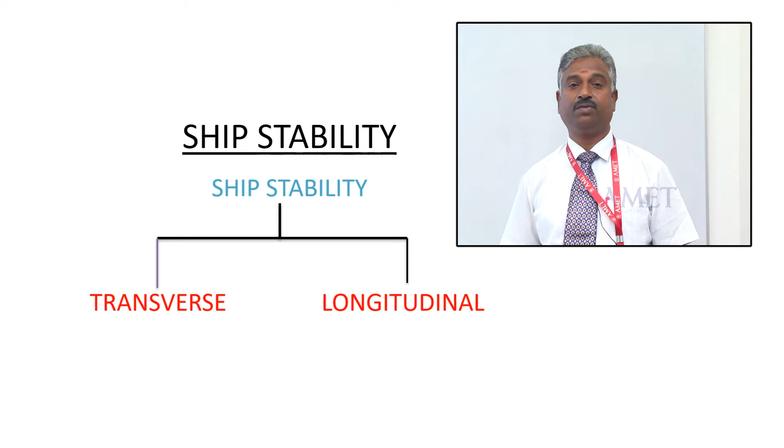But it is not the same in the case of a ship, because the ship is moving in the water, floating in the water. Water will not remain calm always. The sea will be always changing its state, sometimes calm, sometimes it will have more waves. According to the property of the sea, the ship has to respond.

So the ship will never always go upright. It has to list, roll or trim in various states. When a ship is disturbed by external force, whether natural or artificial, whenever that force is removed, the ship must come back to its original position and float upright. That is the property of a ship.

That is what is called stability. It is the ability of the ship to float upright, and also it should move - it should not that it should only stay in one place, it should keep on moving. That is what stability is. We can divide stability into two.

One is transverse stability, another one is longitudinal stability. In this class, we will first discuss about transverse stability. Transverse stability is a very important concept in the ship's properties.

Most ships lose their stability, or most ships even sink, due to loss of transverse stability only. There are less chances of loss of longitudinal stability in case of shipwreck. Otherwise, in different weather states like tsunami or rough weather, we can only see a loss of transverse stability, but not longitudinal stability. So transverse stability is very important in a ship's life.

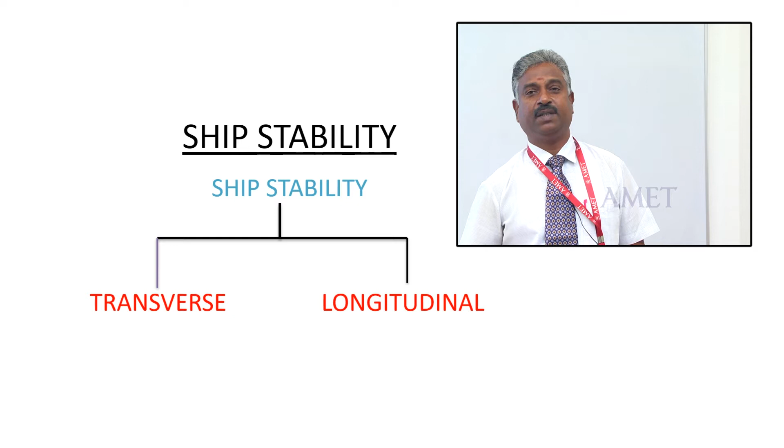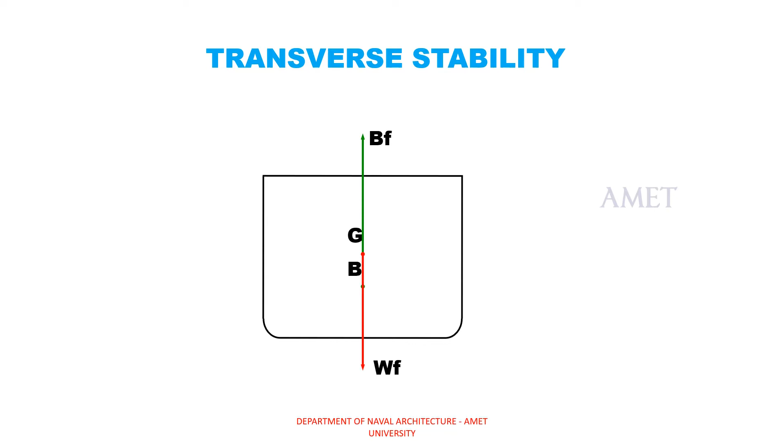This is the cross sectional view of a ship, generally we draw this to discuss about the ship. This is the center line of the ship. For a ship to float upright, there are two basic forces.

Like in our normal life, in our body, when I am standing like this, there are two forces: one is my weight, along with the weight the gravitational force acting downward, and the reaction force. When these two forces are balanced, then only I can stand. When a man falls down, it means there is a difference in the reaction of these two forces.

Same way, in a ship there are two basic forces: one is buoyancy force, referred to as BF, another one is weight force, that is the weight of the ship. BF is the buoyancy of the ship. What is buoyancy? Buoyancy is the upthrust given by the water for the ship to float.

When any object floats in water, it experiences an upthrust. That only makes that object float. How an object will float or sink depends on density.

Density is an important concept which makes the object either float or sink. When the density of the floating object is less than the density of the water in which it is floating, then the object will float. If the density of the object is more than the water, then that object will sink.

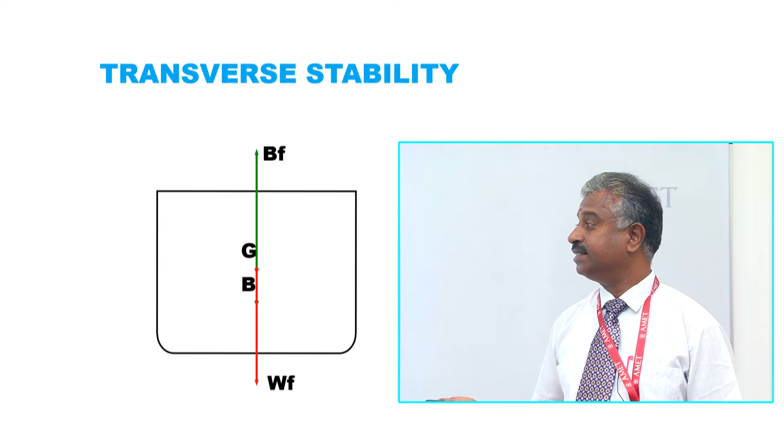We may say that in any game you take, there is a trump card. For example, in playing cards, there are trump cards or jokers which decide the game. Same way, these two, center of gravity and center of buoyancy, are the two main components which decide whether the ship will float or sink.

It is very interesting to know how this works. The center of gravity, we know, always acts downward through the body of the ship, that is the center line. Same way, center of buoyancy - most of you may not know the definition, what do you mean by center of buoyancy.

Why? Because center of gravity you already studied, it is quite common - it is a point through which all the forces are assumed to act downward, it is an imaginary point. Center of buoyancy is similar to that, but it is opposite. What is center of buoyancy?

Center of gravity is related to the mass of the ship. When the mass of the ship changes, the center of gravity will obviously change.

Whereas center of buoyancy is related to the underwater volume. What is underwater volume? Underwater volume is the volume of the ship below the waterline. That underwater volume also will have a center of gravity, and that center of gravity is called the center of buoyancy.

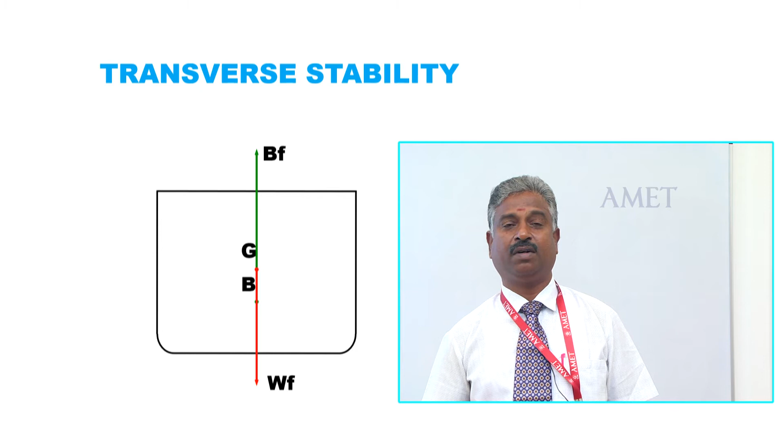So this is the relation between center of gravity and center of buoyancy. Now let us go to the next concept of transverse stability. This is what we have discussed right now: G, center of gravity; B, center of buoyancy; WF, weight force; BF, buoyancy force. We will see the next slide.

What is transverse statical stability? As I told you in the introduction, it is a term used to describe the ability of a ship to return to upright when it has been forcibly heeled by an external force to some angle and is momentarily at rest in still water. This is what statical stability or transverse stability means, and we are going to continue with the next slide.

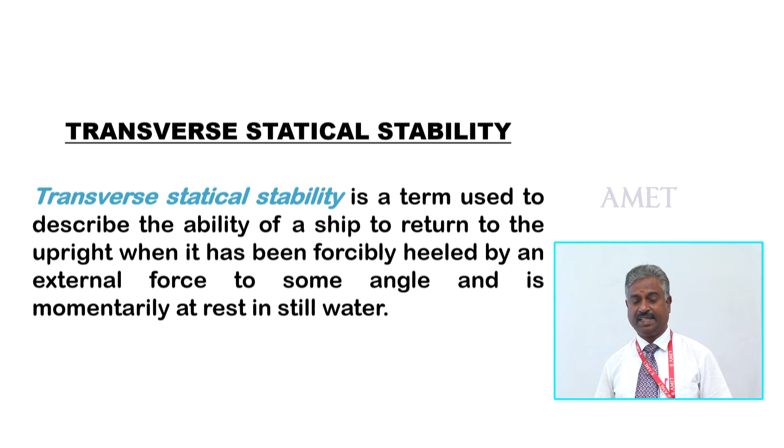What is G? It is the relative position of the center of gravity and the center of buoyancy as the ship is heeled to a particular angle that determines how stable a ship is. That is what I just told you, how important G and B are and what is the relation between them. When the ship is upright, the lines of action of both the weight force and the buoyancy force act through the points G and B as shown. If the ship is heeled by external force, as I told you, that is the difference between heel and list.

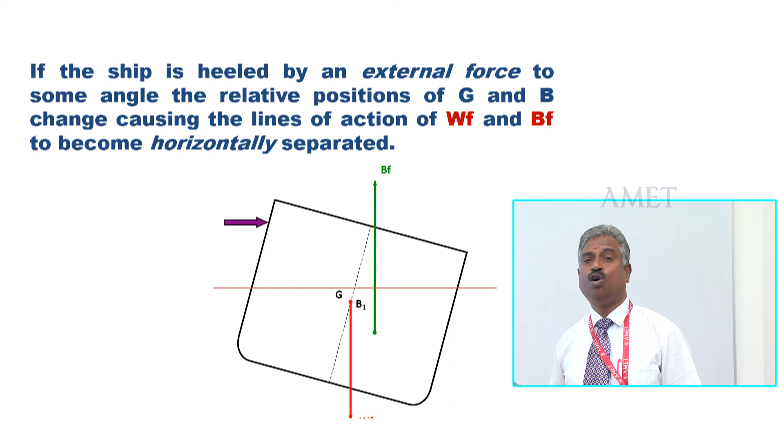When you say heeled, it means it is due to external force only, like wind and waves. When it is heeled by an external force to some angle, the relative position of G and B will change, causing the line of action of weight force and buoyancy force to be horizontally separated. Now you can see from the diagram, the center of gravity and center of buoyancy no longer lie in the same line. It has been separated, you can see it here.

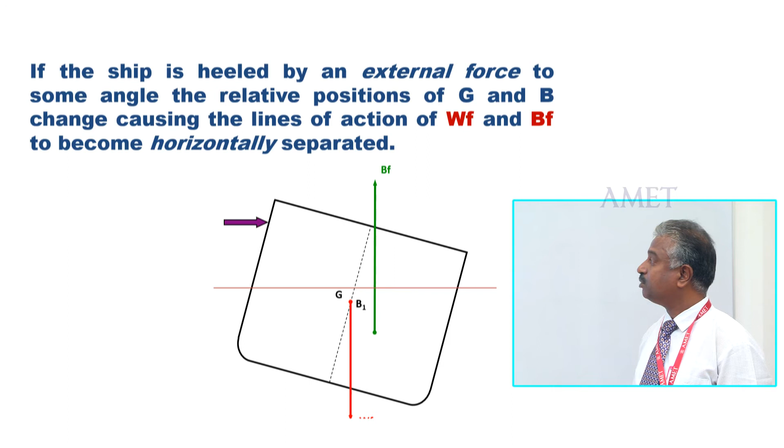This is the new center of buoyancy, through which the buoyancy force acts, and this is G. You can see where G has not changed, only B has changed. You can further understand this in the next slide.

Now it is clear to you. Here you see this is G, which is still lying on the same center line, with the weight force acting downward, whereas the buoyancy has now shifted from the center line, acting upward. This is the water line, and this is the underwater area.

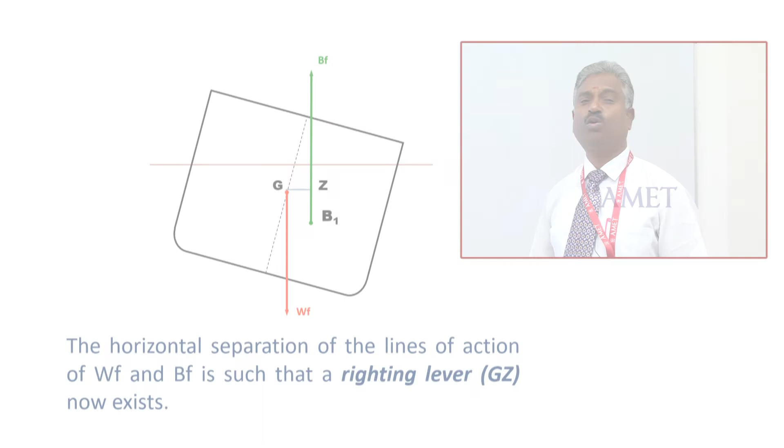Now, the question is why does the center of buoyancy shift but the center of gravity does not shift? This is a very fundamental question. I already told you that the center of gravity depends upon the mass of the ship, whereas the center of buoyancy depends upon the underwater volume of the ship. When the mass of the ship changes, the center of gravity will change. When the underwater volume changes, the center of buoyancy will change.

Here, only the underwater volume is changed. That is why the center of buoyancy is shifted.

With respect to the center line, the underwater volume on the port side is less and the underwater volume on the starboard side is more. So obviously the center of buoyancy will shift towards the side where the volume is more. That is why the center of buoyancy has shifted from the center line to the starboard side, and it is acting upward.

Now there is a distance created between the center of gravity and the center of buoyancy. Let us see what will happen due to this, whether the ship will come back, stay as it is, further incline, or sink.

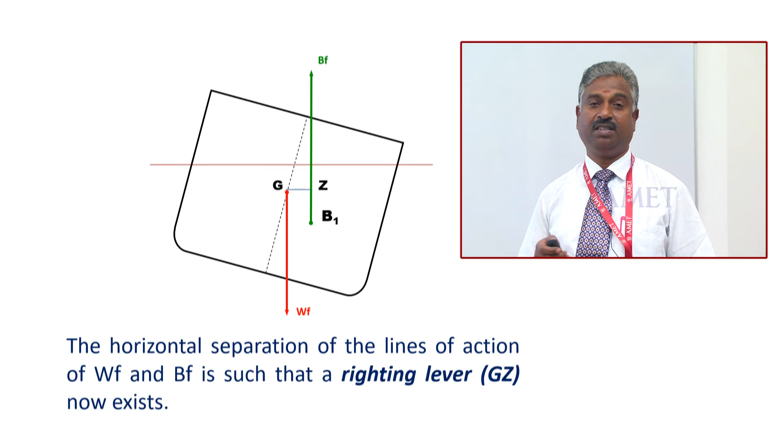These are the various positions of the transverse stability of the ship. Now look at picture 1. This is a ship floating upright, and this is the center line where the green one, the buoyancy force, and the red one, the center of gravity or gravitational weight force, both are acting in the same line, and also acting opposite to each other.

That means it is stable and upright. We cannot say that if a ship is stable, it should always be upright. It is not conditional like that - it can be inclined also, and then also the ship will be stable. That can be witnessed by this sketch.

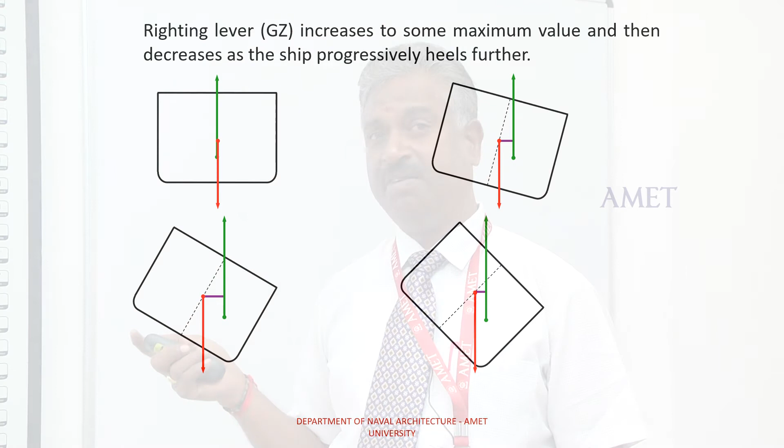Now look at this diagram. This is what we just discussed in the previous slide. Due to the external force, the center of buoyancy has shifted and is acting upward, and there is a lever created between these two forces, which we call the righting lever GZ. So this is a lever. This side is starboard, this is port side.

Now, you can say this is a positive quadrant, this is a negative quadrant, if you see the graph in mathematics - this is positive and this is negative. In this case, the ship will come back to its upright position. That we will discuss in the next coming chapter.

Now refer to this diagram. Here, the righting lever keeps on increasing - the value of the righting lever keeps increasing. After a particular angle of heel, if the ship further heels, you see the righting lever is reducing. It will reduce.

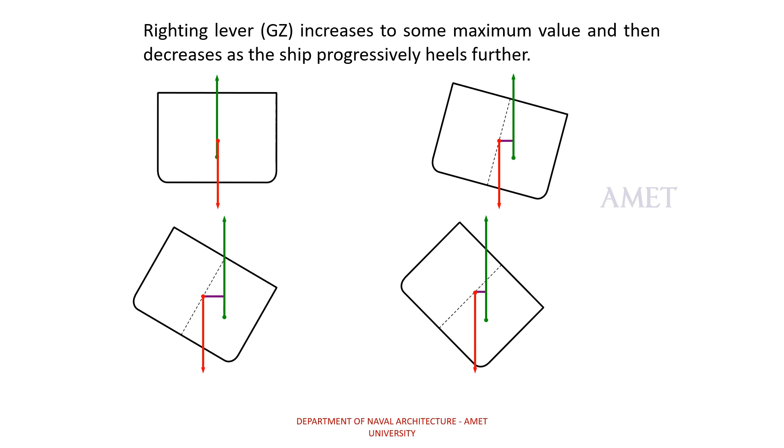Further heeling of the ship, this lever may come to this side, which I told you is opposite to the righting lever. This lever will make the ship capsize. We will discuss that in the next slide.

Now look at righting moment. What is this righting moment? Moment is the force which makes the ship come to upright position when it is heeled by an external force. It is a moment, the one which brings back the ship. What is moment? Force into distance. Here what is the force?

Displacement of the ship. What is displacement? Mass of the ship, that is the force here. What is Gz? Gz is the distance which we saw, the righting lever. Gz is the distance, and force is the weight force, that is nothing but the mass of the ship, which results from the buoyancy force which is equal to the ship's displacement acting on the end of the lever Gz, which pivots about G.

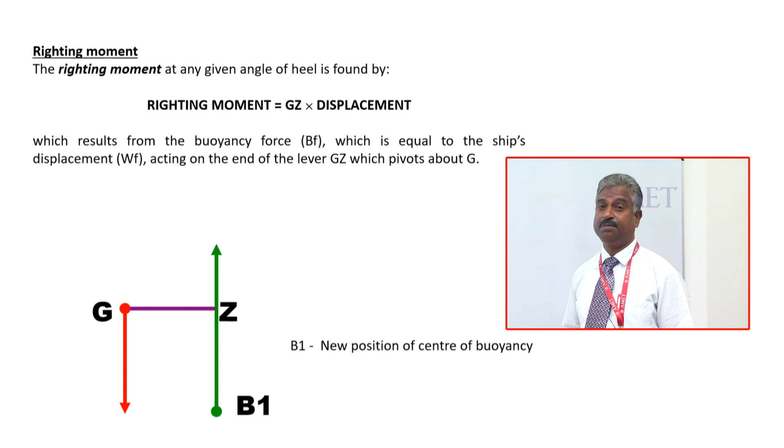This B1 is the new position of center of buoyancy. Now this is a mechanism which is used to bring the ship back to its upright or initial position, that is called righting moment. This is the concept which makes the ship float upright whenever it is disturbed by an external force, that is ship is heeled. Next we will discuss further about the heeling or listing of the ship from the next slide.

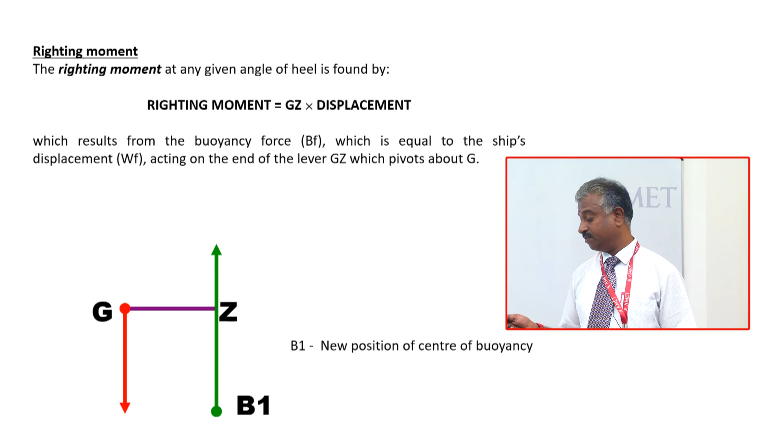In continuation with this, you must become familiar with one more term, that is metacenter. What is metacenter? It is also an important point in case of the stability of the ship. You might have already studied metacenter in physics, but you will see how it works practically in a ship, and you will be surprised how it plays an important role. First let us see what is a metacenter.

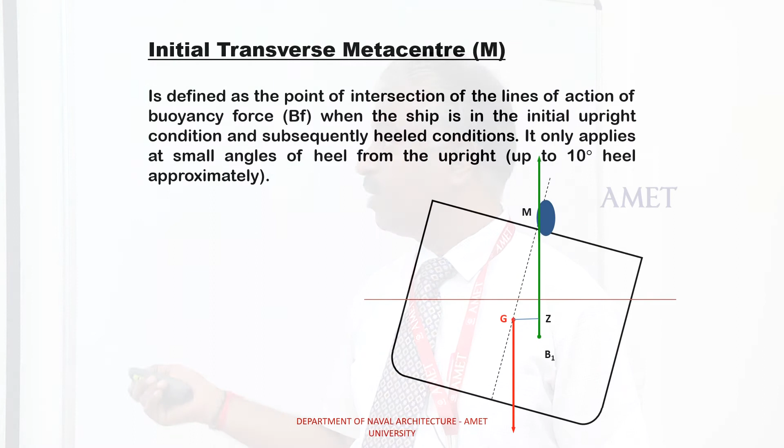Now this diagram we have seen, it is a transverse section of the ship, and we have seen what is G, what is B, and what is Z. Now you see this is the water line. When the ship is inclined, that is heeled due to the external force, we saw the center of buoyancy shifts from B to B1, and it is acting upward. When it acts upward, if you draw a straight line through that, the center of buoyancy line will intersect with the center line of the ship.

This is the center line, and this is the vertical line drawn through the new center of buoyancy. When these two lines intersect, we will get a point, that is called metacenter. This metacenter is also a vital concept in the stability of the ship. Why? Because you can see the G and this M, this GM, already we saw GZ, that is the righting lever.

Same way, this GM is also very important in the stability of the ship. Like how we decide whether the ship will float or sink, or float upright or incline, this depends on this GM. GM is called metacentric height.

We will discuss about metacenter. M is defined as the point of intersection of the lines of action of buoyancy force when the ship is in the initial upright condition and subsequently in heeled conditions. It only applies to a small angle of heel. This concept of stability applies for a small angle of heel. When the angle of heel increases more than say 10 or 15 degrees, the concept will vary. That we will discuss in the next topic.

Now we will discuss about the next step of this stability from the next slide. As I told you, metacentric height GM is the vertical distance between the ship's center of gravity and the metacenter. The GM is very important in determining the initial stability of the ship, that is the stability of the ship at small angles of heel. So the metacentric height GM, like GZ the righting lever, is also equally important, which decides the stability of the ship.

As far as I am concerned, I hope you would have understood the basic things we saw about the stability of the ship. If it is very difficult to understand, you can again go through the slide, whatever material I give, it will be very easy and it will also clear your doubts.

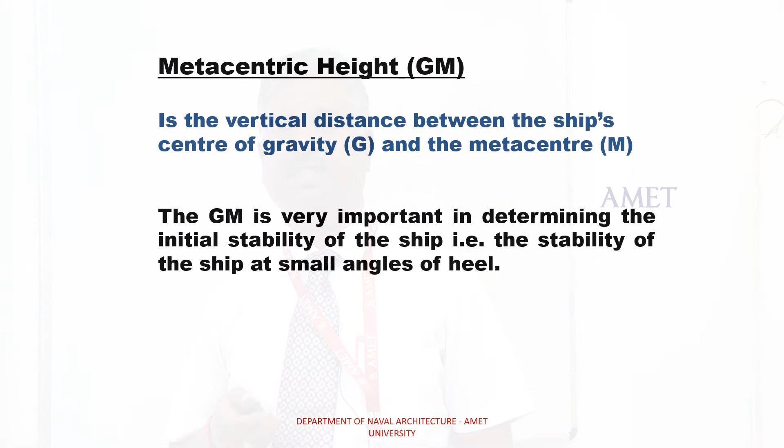Further proceeding in this topic, next class we will discuss about the various states of equilibrium which is related to the metacentric height, ship center of gravity, center of buoyancy and righting lever. We will discuss how it makes the ship float upright or inclined, or causes it to capsize. Thank you.